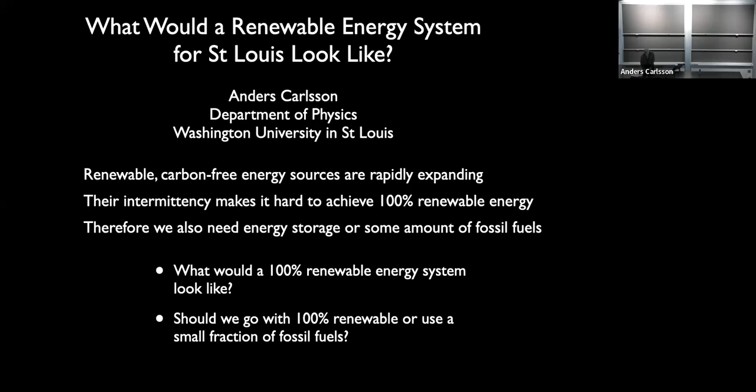Earth's temperature is rapidly rising.

And so this is the problem, that this is a plot of temperatures over the past 1,000 years.

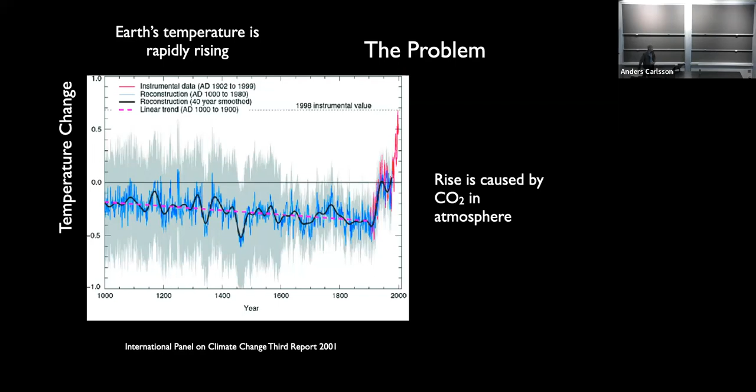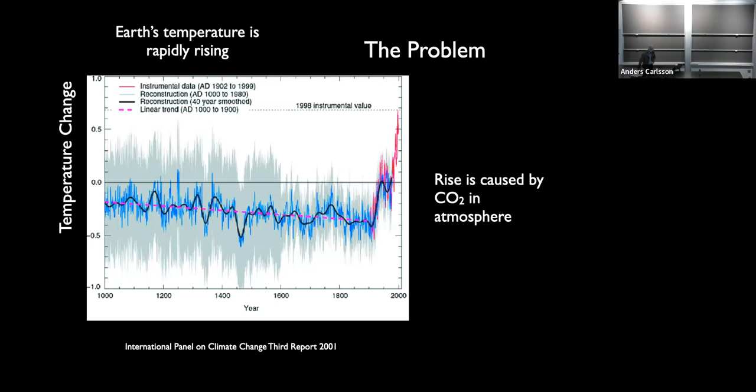And so we've seen, if we look over the past 1,000 years, we have a pretty slow drop in temperature. Then roughly since the Industrial Revolution, the world average temperature has been climbing precipitously. And it's pretty clear that this is due to the CO2 that humans have put into the atmosphere. And this has impacts

all over the place. As you know, especially in St. Louis, we have frequent and intense storms, and you can't attribute any given storm to global warming. But nevertheless, there are people that specialize in attributing statistics of storms to global warming, and they argue that we are seeing more frequent and intense storms because of global warming.

Rising sea levels, that's very rough for coastal cities, and of course there are entire island nations that will disappear. Melting glaciers is a very bad thing. Warming oceans are bad from the point of view of the fish that experience a different chemical environment and cannot survive in the new temperatures.

It also wreaks havoc on people's livelihoods. Farming becomes difficult, completely changes character, and also it does harm to animals. And so about a quarter or more of the CO2 emissions are due to electricity generation. Okay. So here are some pieces of a possible solution.

So I drove out to Kansas City about a week ago and was pleased to see a number of solar arrays along I-70 on the way to Kansas City. And this is feeding into Ameren's energy supply, which is a good thing. And if you drive up to Chicago, you actually tend to see more windmills. So as you look around you, you drive anywhere, you see that this is taking off rapidly.

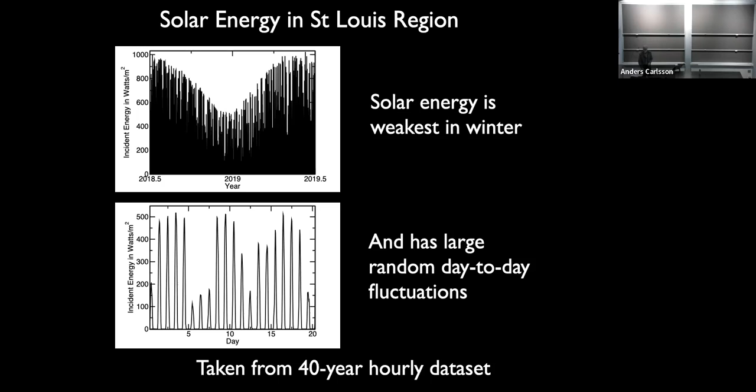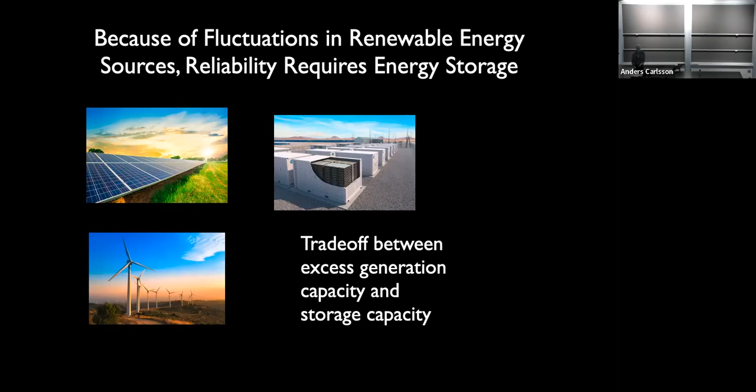But one thing I want to get across is that if you want reliability, you can either build much more capacity to cover even those partly cloudy days, or you can have storage, one or the other. And the choice between those is going to be determined by the relative cost of storing electrical energy versus generating it. Okay, now, so I'm going to be telling you about some designs that I've been making.

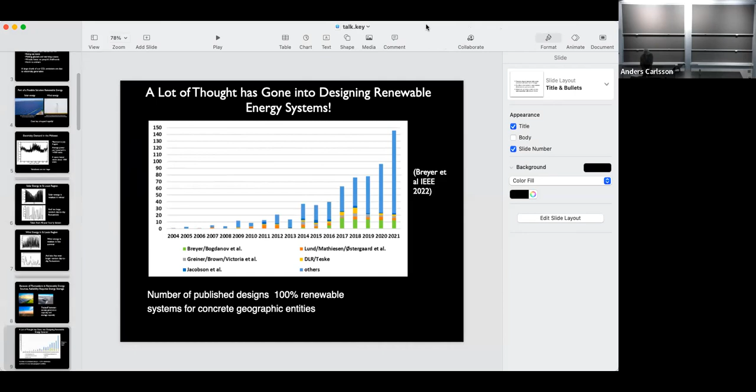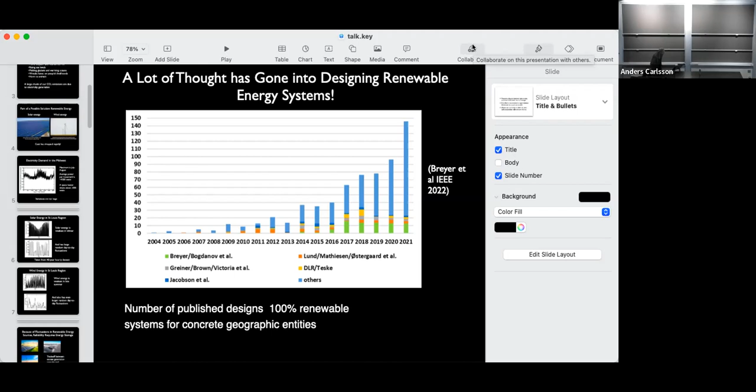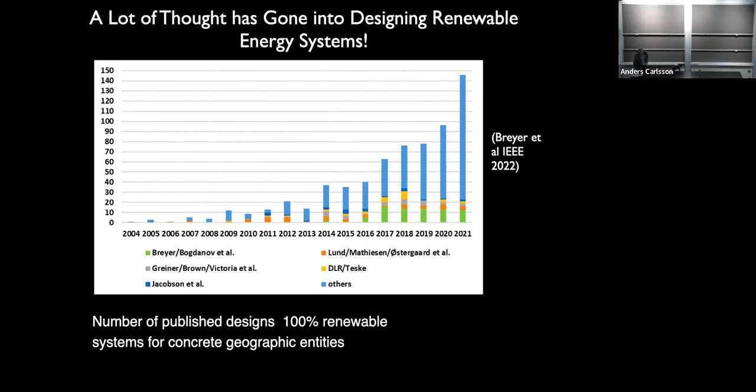Okay, so I'm going to be telling you about some of my designs for renewable energy systems. And I don't want to say that I'm the first person that's done this. In fact, this has become a cottage industry. So this is the number of papers per year that have gone into studying various kinds of highly renewable energy systems. So this is really a field of study that's taking off. One thing is that they don't agree with each other. You read different papers that should be looking at the same system, but they end up getting rather different answers.

So we're going to do this by designing the system, choosing the system that supplies our energy needs and has the lowest cost. So we need to talk about cost a little bit. And so for solar panels, if you buy one, the cost will be given as something like $1,500 per kilowatt of capacity.

And what does that mean? If a solar panel has a kilowatt of capacity, that means on the best possible day, it'll generate a kilowatt or 1,000 watts of energy. So that's just a way of saying what that means. It's like a nameplate number. It doesn't mean it usually generates a kilowatt. It's just on the best possible day. Okay, and as I mentioned, a kilowatt is the power that's drawn by a space heater.

On the other hand, storage costs about $200 per kilowatt hour. Okay, now why are we talking about kilowatt hours? Well, the reason is that if you run your space heater all day, it's different from running it just 1 hour. In other words, the amount of energy that you use is determined by the power of the device, but also how long you use the device. And so it actually is measured in terms of the power times time.

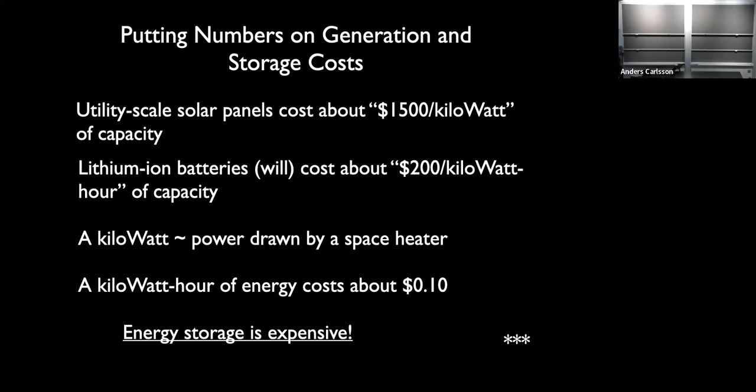Okay, so those are the numbers per unit, but really what matters is how much this is going to cost us in terms of our everyday life. So let's think about the cost in a different way. I'm going to talk about a baseline solar generation capacity. What I mean by that is that we have enough panels so that over the course of the year, they generate the same amount of electricity that we use during the year. Now, if we do that, they're generating too much in the summer and too little in the winter. But that's just a useful reference point to think about the generation capacity.

And so that would cost about $35,000 per household, and it would take up about 50 square miles. Now, anybody happen to know the area of the city of St. Louis? 61, I think. Yeah, I think that's right. So I'm not talking about just the city of St. Louis here. I've been looking at a region that's about 200 by 200 miles around St. Louis. So out of that, it wouldn't be hard to come up with 50 square miles for solar panels. And on the other hand, a battery unit to handle a day's energy consumption costs about $22,000.

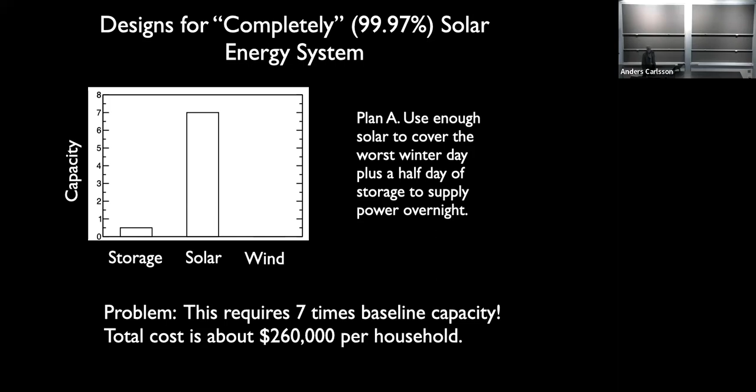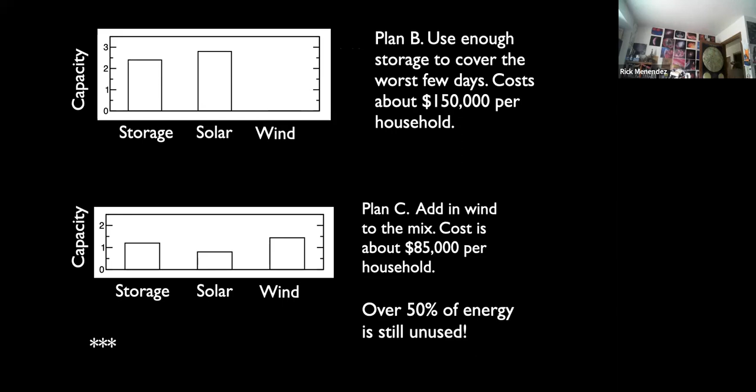But this is just out of the question. This is way too expensive. So what can we do? We can optimize the amount of solar and the amount of storage. That's what our calculations do. We wrote a computer program that follows the amount of energy in storage over time. Let's say we start off with a full battery. We've had a lot of sunlight.

And then the computer program, every hour, ticks forward. As long as we're getting enough sunlight, the battery stays full. But if we get a dark day, that battery starts to empty. We follow that process of the battery emptying, and hopefully it doesn't get completely empty. If the battery gets completely empty, then the system has failed. So the requirement is not actually to be 100% renewable. It's 99.97% renewable. So that's what we look at in these designs.

So we look at all these combinations of a certain amount of storage and a certain amount of generation capacity, see the ones that are 99.97% there, and we choose the least expensive one. That's the system on the top there. It's got about 2 days of storage, and it's got between 2 and 3 times the baseline capacity of solar. And that brings the cost down to $150,000 per household. Okay, that's still really a bundle.

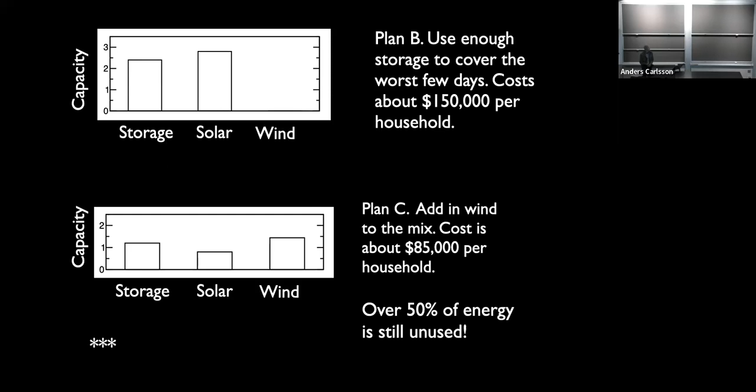Okay, so now here's the question. Do we need to get all the electricity from renewable sources, or only maybe 97 or 98%? You know, what's a better choice? In other words, forgetting that last percent, are we using a pound of prevention to get an ounce of cure? And so I want to show you some calculations we did for that.

And so we're going to try to design what I call a socially optimal system. And by socially optimal, I mean that on the one hand, we're including the actual cost of building the system. But also for all the systems we look at, we're going to look at the costs of generating the CO2 from those systems. So there's going to be a penalty for generating CO2. Why not? That's our typical way of limiting certain behaviors, is to penalize them.

And to do that, we need to define the cost of the damage done by carbon dioxide emissions. And this is known as the social cost of carbon. And it's a number that's so many dollars per ton. And it's a way to try to define the value of the future damages done by a ton of carbon dioxide emissions. So let's make a quick estimate of that.

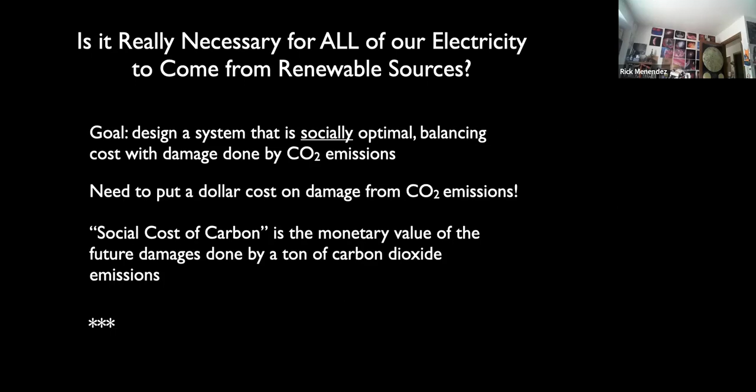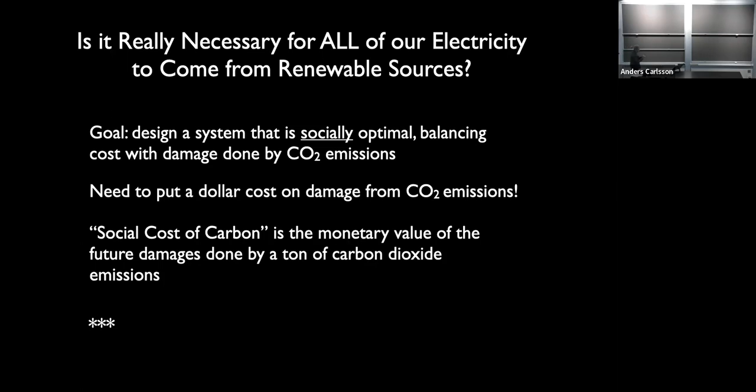And it turns out that for CO2 to actually go back into mineral form, where it's really not damaging anything, it takes about 200,000 years. Okay, so we're going to take our $10 per year and then multiply that by 200,000. And so that'll give us a cost of $2 million per ton. Okay, that's a big number. The economists don't like that.

Economists have an approach to this that's called discounting. And it really means that damage that's done in the future is less significant than damage that's done now. Which has a lot of problems when you think about it. It means, for example, that something that's done to our grandchildren is less bad than something that's done to ourselves.

But the logic is that we'd rather have, say, $10,000 now than in 10 years, because we can always invest it and presumably come back with more than $10,000. So if we'd rather have a good thing now than later, that means we'd rather have a bad thing later than now. And that's true. I guess I would rather have a toothache in a year than have it now. But

the thinking is also that the people in the future will be wealthier than we are. Think back to the late 19th century, living standards were very low. Do we think that those people in the 19th century had an obligation to sacrifice their standard of living so that we could live better? In that sense, that's kind of an argument for discounting. The argument is really that future generations are so much wealthier than we are, so why should we support them if they're going to be so well off?

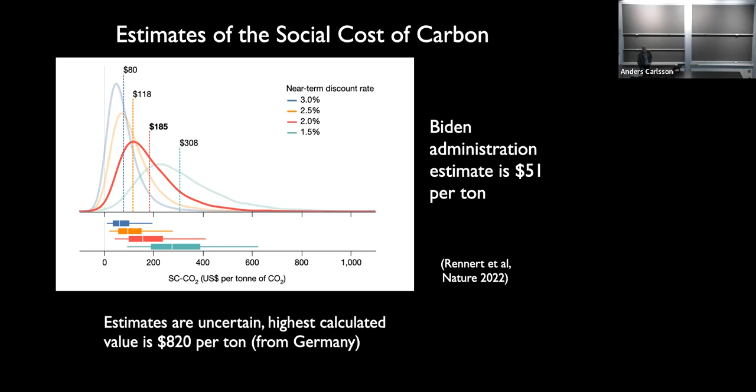So the cost is the cost of the generation, plus the cost of the storage, plus the cost of the windmills, and now also plus the actual cost of generating electricity from the gas, as well as the social cost of generating the electricity. So that's the whole social cost of our system. And then we look at various systems, and we choose the system that has the minimum total social cost, the total regular cost plus social cost.

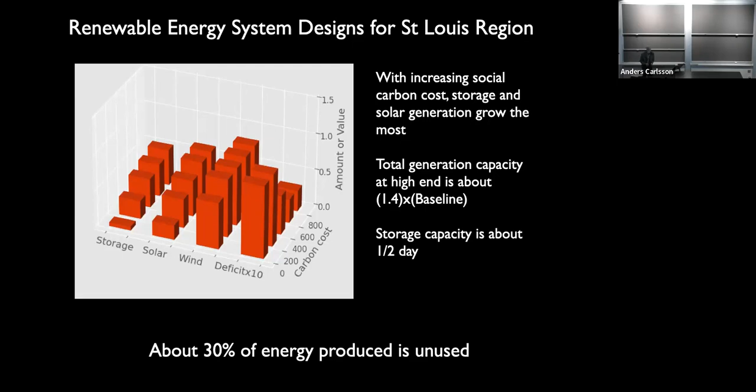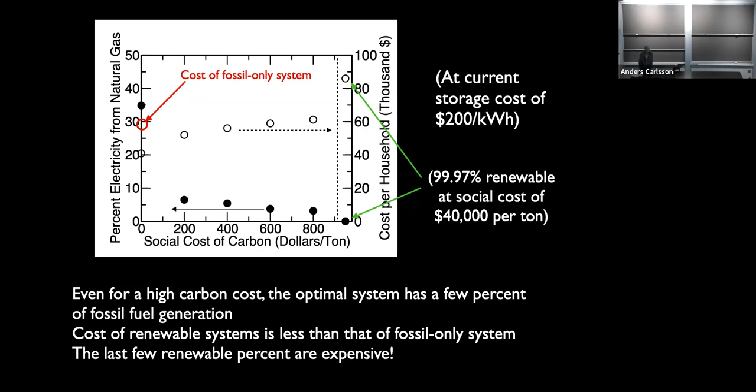Well, maybe we're not going to have to answer that question. Maybe things are going to get better in some way or other. Maybe storage will get a lot cheaper. And later on, I'll talk about some ways that might happen. So if storage gets cheaper, well, then we use a lot less storage, and the system cost actually gets reduced by about 30%.

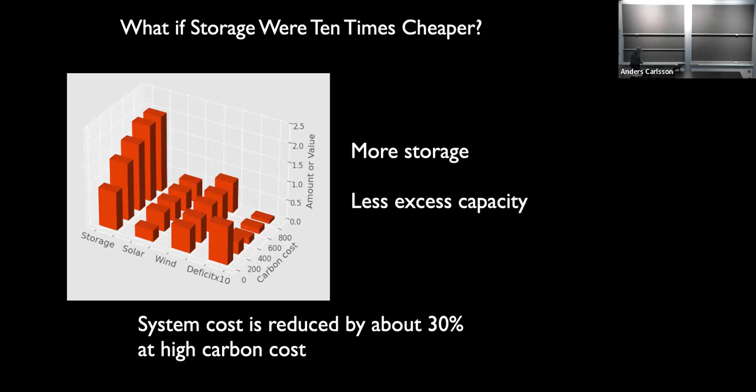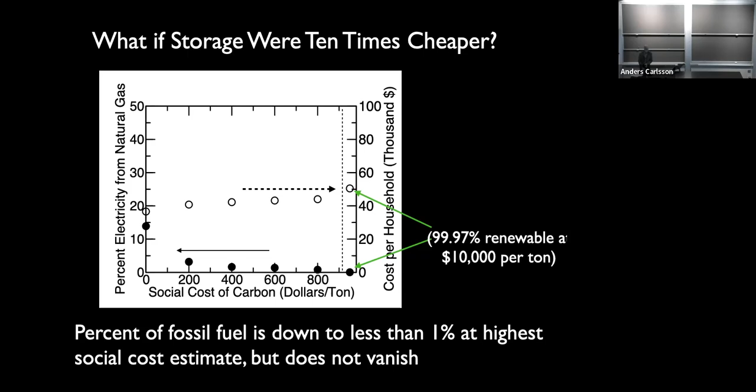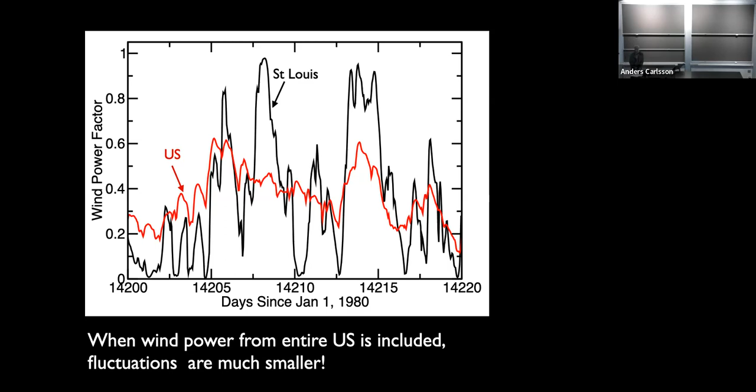And so that means that if we happen to be having high winds up in Washington State now and there's nothing here, then we could bring that electricity here. And this smooths out the fluctuations a lot. So this turns out to make a big difference also.

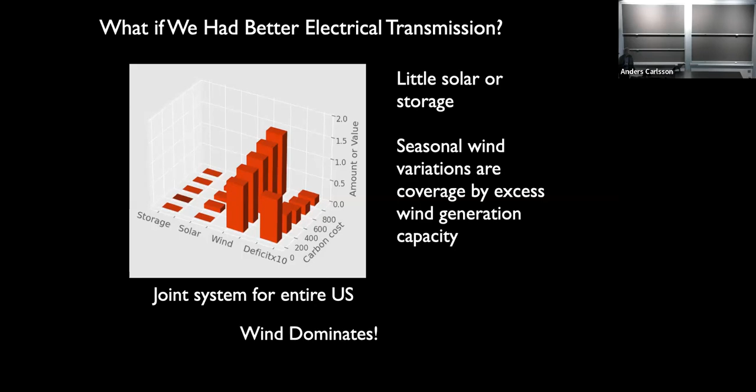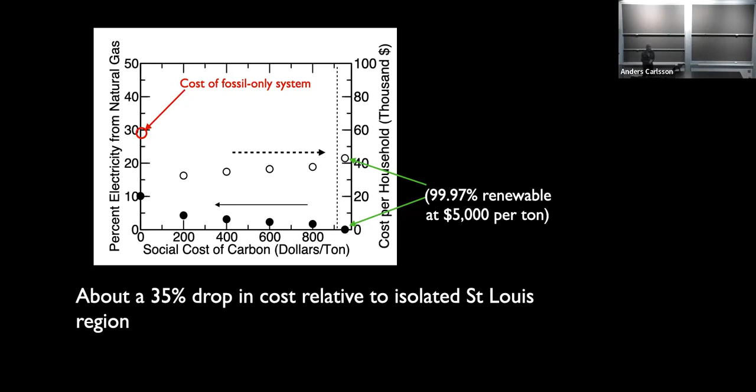And then this also makes the system less expensive, and you don't really pay as much extra for those few percent. So these are all things that could be happening. You can combine them, and it gets even better if you say have cheaper batteries and you have better transmission. Then the whole system cost drops by about a factor of 1/2, down to about 30,000 per household.

So let's speculate a bit. Let's think about the future, what might happen. The National Renewable Energy Laboratory has made predictions about how battery costs might drop over time. And this is for lithium batteries, which have seen vast improvements over the past decades.

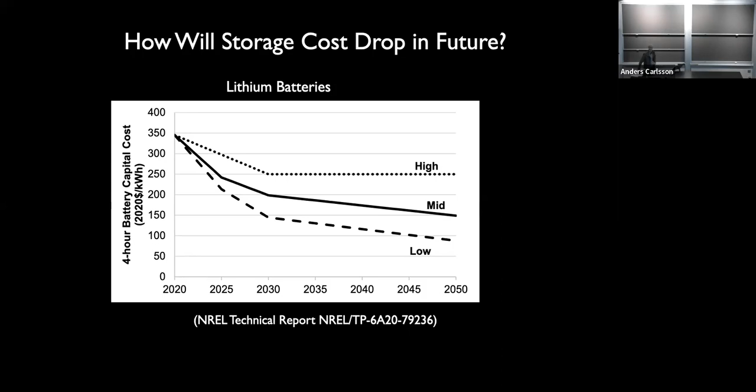So what else might happen? Well, there are many battery technologies under investigation. And one that I think is promising for grid storage is a so-called flow battery. And a flow battery is not a solid hunk like a lithium battery. It's actually 2 big vats of fluid. And these fluids are chemically different from each other.

And so it turns out the battery runs by protons moving from one fluid to the other through a membrane that's between them. And so this is nice because if you want a bigger battery, then you just have a bigger vat of the same stuff. And what controls the amount of power, say how quickly you can get energy out of the battery, is a membrane between them, but you can also make that membrane bigger. So these are batteries that you can really adjust to the size that you want.

And you can play with these chemicals, and so then there are materials problems for lithium batteries, getting lithium and cobalt, and those can potentially be a lot less for flow batteries. My understanding is you won't get the energy density anything like lithium ion, but so what, at a utility that's not important. Yes, thank you for mentioning that. We couldn't put this in a car because in a car, we need batteries to be light and small. But for the utilities, that's not really an issue.

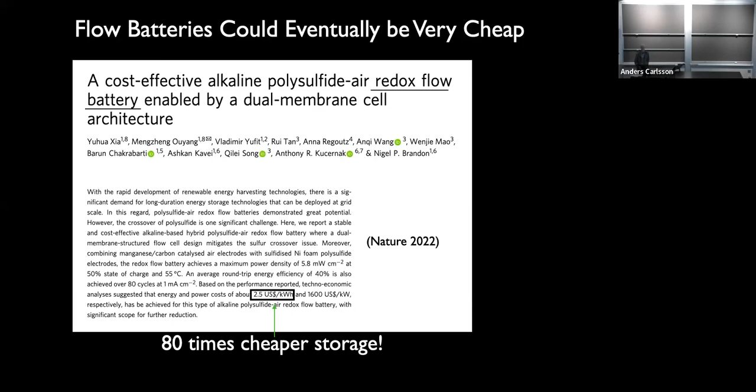Okay, hydrogen generation and storage is another possibility. Right now it's not that efficient. The basic idea is that you take energy from solar panels, you use it to drive an electrolysis process that generates molecular hydrogen, and then the molecular hydrogen goes into a so-called fuel cell, which converts it into electricity. And the trouble is really that the fuel cells are not that efficient. And electrolysis has been going on so long, it's probably not going to get much more efficient than it is. And so between the two, the process is actually, I think, a little bit less than 50% efficient.

But if we have these renewable energy systems, we have this curtailed energy. We have energy that we're just throwing away. If we're throwing it away, maybe it would make sense to make hydrogen out of it and have that as a piece of the economy. Yes. Well, and hydrogen transmission would be actually way more efficient than electrical long distance transmission, right? I think so. Yes. I think hydrogen would require an upgraded infrastructure from our current methane pipeline system. Yes, that's true. Hydrogen will escape more than methane will. Yeah.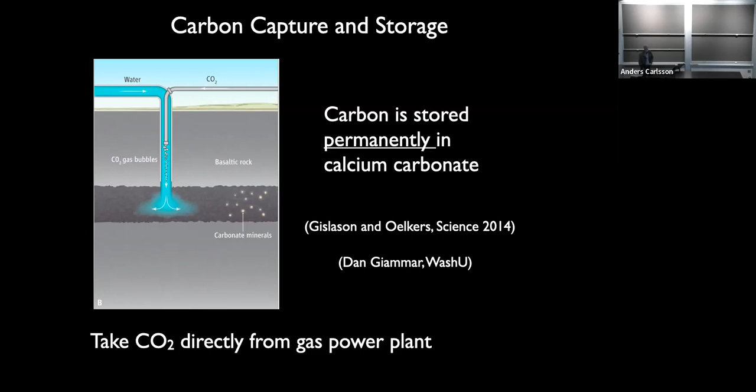So you could imagine that you could take the CO2 that's generated at the power plant, capture it before it goes into the atmosphere, and then you could send that down into the earth. Not for most of our generation, but for a few percent. And so then we could imagine this system with the carbon capture added on.

And this would make sense if the cost of sequestering the carbon is less than the social cost of carbon. And my preferred cost of carbon is about $1,000 per ton. And so I think that there will be viable technologies for carbon sequestration that will cost significantly less than that. So that would put us in a picture where we have the solar and the wind and the storage, and then a few percent that's coming from gas-powered plants, and those gas-powered plants would be sending their CO2 below ground to be turned into calcium carbonate.

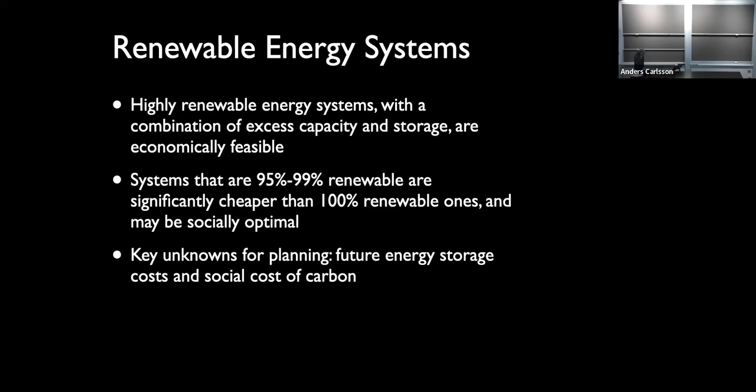But that's the capital cost, but what about the maintenance cost? I assume that's what you're talking about. Yeah, all that maintenance. Well, the economics I did here was very simple. I just assumed that for every technology, there was a capital cost, and it would expire after 20 years, and we'd have to make a new one. So the maintenance would go into that. So it's basically like a depreciation. Okay.

Do you have any thoughts about how to move from the science world of optimization studies into the political and public policy world of actually implementing it? It's one thing to have the perfect system designed, but it doesn't mean anything ever happens. Right. That's a really good question. And to be honest, that's not my strong point. But I'm frustrated kind of sitting here designing optimal systems, and I know that they won't necessarily get reached.

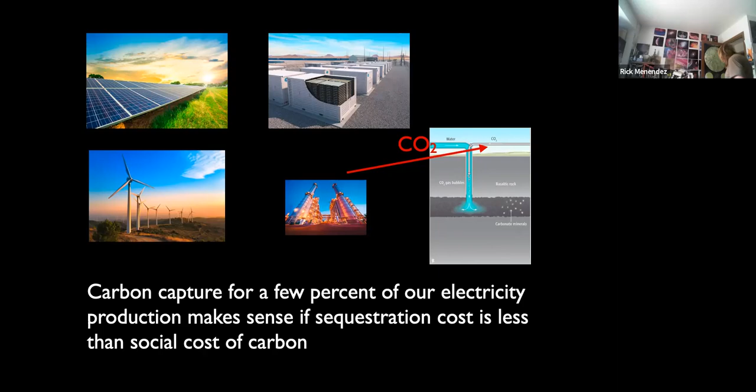Can you speak to the growth and impact of distributed energy systems? By distributed energy systems, you mean like in a community? Less reliance on the national grid. Yes. I have solar panels in my house, and I benefit hugely from being connected to the grid, because whatever extra power I generate, I can send back to the grid and then get it back.

But in distributed energy systems, you're trying to be less reliant on the grid, and so you have to deal with larger fluctuations. There's no way of getting around that, so you have to have some way of dealing with it. Then the storage and the backup become a bigger part of it. So certainly it's going to be more expensive, but it might be worth it for the independence.

Let me ask this question. You showed the electrical grids in the United States. 20 or 30 years ago, Con Ed went out, and the electricity went off in the eastern part of the United States. Would the government ever have an economist look at how much was lost by the grid going out, versus being able to transfer energy from other places in the country so you wouldn't lose the economic impact of a whole grid going out?

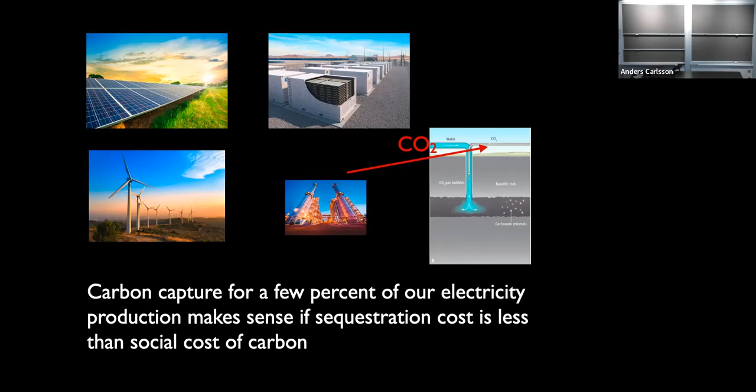Back to electrolysis, it looked like you were talking about using energy from solar cells to do it. Whereas for a long time, there's been interest in developing some kind of catalyst to use sunlight directly in a catalytic process to generate hydrogen. In theory, that could be a super efficient way, right? That would be direct photochemical conversion. Yes. Again, somehow that's not what seems to bubble up when I see what's hot at DOE. You'd have to be arguing that it's better than photosynthesis. Well, if it was as good as that, that would be plenty to generate hydrogen at that rate.

How much R&D money is going into the study of renewable energy? Well, let's see. I get these notices from DOE that occasionally they've awarded another $100 million and another $100 million. Who is doing this? Where's the money coming from? It's coming from the Department of Energy. They have been getting serious about funding renewable energy research. And then it's going either to universities or into companies.